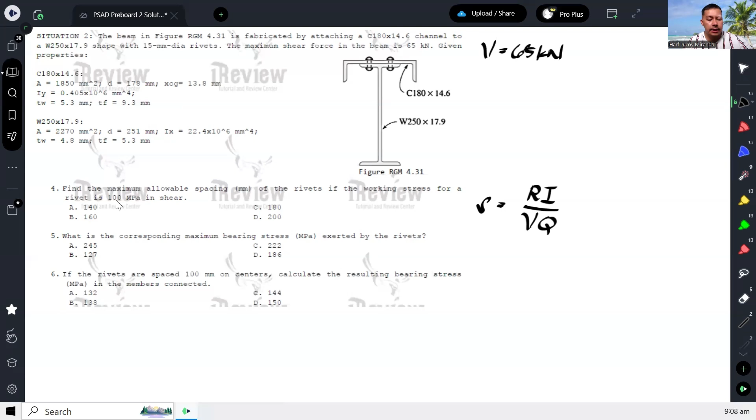First of all, let's define yung R. Yung R kasi ang binigay sa atin dito is yung strength ng rivet sa shear na naka megapascal, so that would be 100 megapascal. Ibig sabihin, that is just force nung rivet divided by area ng rivet, which is pi over 4 times ang diameter ng rivet is 15.

Okay, so dito mako-compute natin yung capacity ng rivet. So that gives us 100 times pi over 4 times 15 squared, so this will be in newtons. So 17.67 kilonewtons. Okay, so yun yung capacity ng isang rivet.

And then I, so let's calculate for I. Yung I naman is yung moment of inertia nitong section na to. May binigay dito na moment of inertia pero ng channel tsaka ng wide flange lang yan. So kukunin muna natin yung location ng centroid.

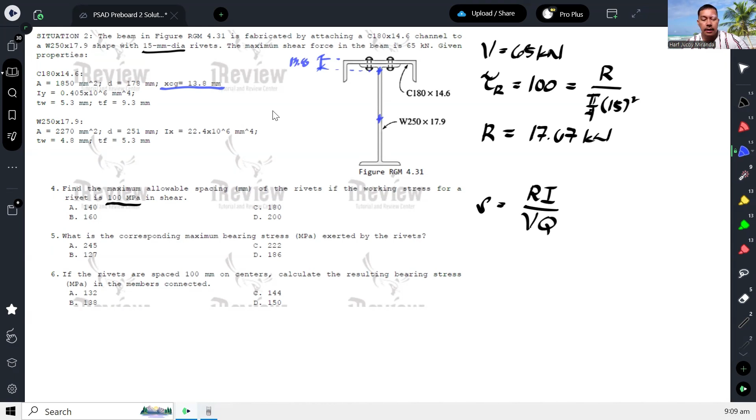So yung centroid ng channel according to the problem is at distance x, which is 13.8. Tapos syempre yung centroid ng wide flange is nasa gitna niya. Pero i-measure na lang natin from the top. Okay, so from the top, we have here thickness ng web nung channel, which is 5.3.

Store natin to. So thickness ng web, which is 5.3 plus overall depth divided by 2. So ang overall depth ng wide flange is 251. So that gives us 130.8.

Okay, and then hanapin natin yung location ng centroid ng built-up section. Tawagin na lang natin to na Y-bar. Okay, and we can calculate that by Varignon's theorem.

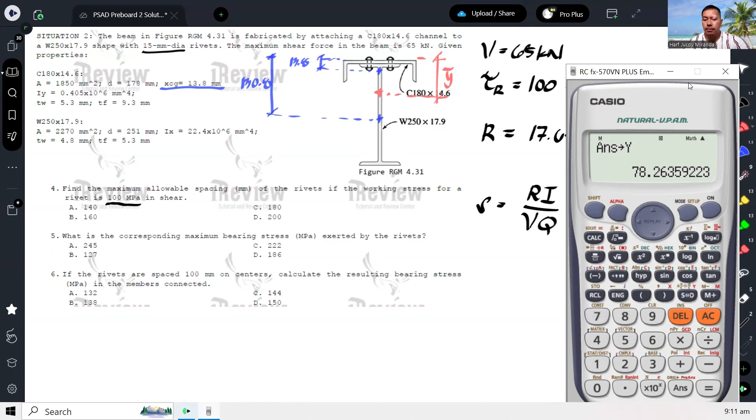So, Varignon's theorem, we have yung area nung wide flange that is 2270 times yung location niya from the top, which is 130.8, plus yung area ng channel, which is 1850 times yung x ng channel, which is 13.8, divided by total area. Total area is 1850 plus 2270. Okay, so that's 78.26. Store natin sa y.

So, ngayon, kaya ko sinolve yun is para makompute naman natin yung moment of inertia, kailangan kasi natin ito. Okay, so moment of inertia tayo. So, ito, sulat ko.

Sa neutral axis. So, yung wide flange, ang moment of inertia niya sa local centroid niya ay ito, which is 22.4 times 10 to the 6 plus AD squared, o yung area niya, 2270 times yung distance na to. Distance sa pagitan ng neutral axis at ng local centroid, so which is ano lang, difference lang yan ito.

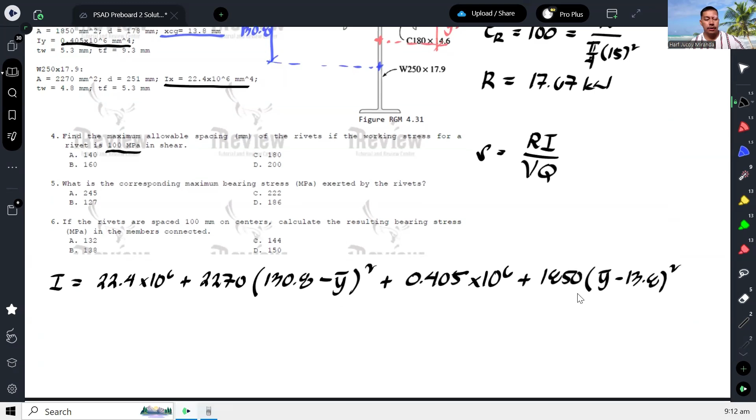Squared. Okay? Plus, yung local centroid naman ni channel, ito, so 0.405 times 10 to the 6 plus yung area ni channel is 1850 times ang distance naman ng neutral axis sa local centroid niya ay ito, which is difference lang ulit ng y bar at ng 13.8 squared. Ayan. So, yun yung moment of inertia natin combined.

So, 22.4 times 10 to the 6 plus 2270 times 130.8 minus y bar squared plus 0.405 times 10 to the 6 plus 1850 times y bar minus 13.8 squared. Okay, so ito yun. Store natin sa M.

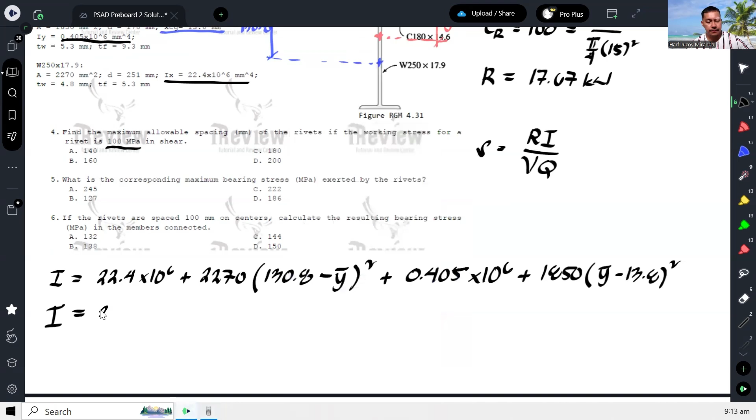So this is 36.758 times 10 to the 6.

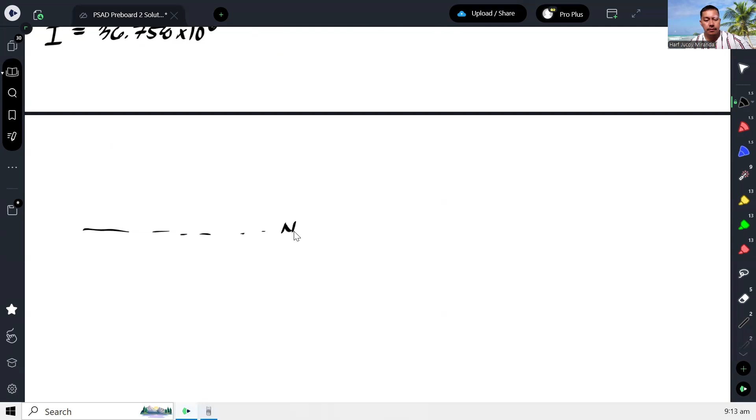Okay, so meron tayong I. So last Q na lang, no? So to calculate for Q, di ba sabi ko yan yung statical moment of area above the rivets. So, ibig sabihin, kung ito yung neutral axis natin, okay? Kasi di ba nandito yung rivet natin.

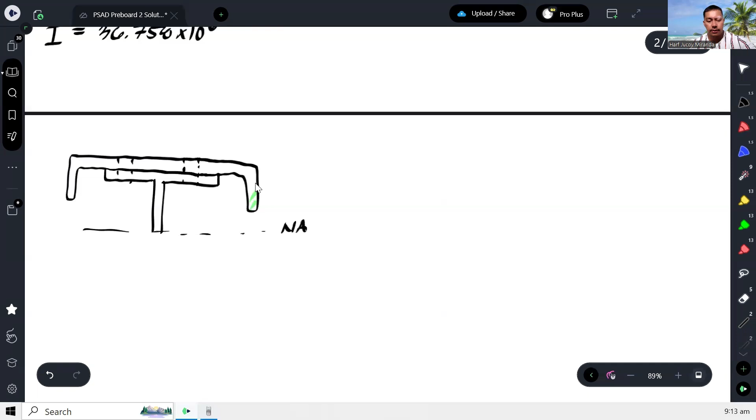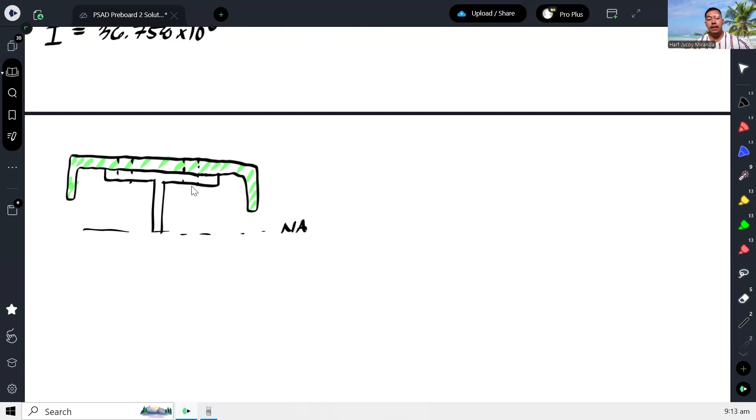Okay, bali, ang mangyayari kasi, itong channel na to ay dudulas sa ibabaw nung wide flange. And para mapigilan yung pagdulas niya, kasi pag nag-bend yan, dudulas to forward eh. Kasi ito naman, parang, kumbaga, parang magkikiskisan sila. So, ang pipigil nun, ito.

Okay, so ano ba yung moment na kailangan niyang i-resist, no? Yun yung Q. So bali yung moment netong channel na kailangan niyang i-resist. So ibig sabihin yung moment na is yung moment area niya from the neutral axis. Bali ito.

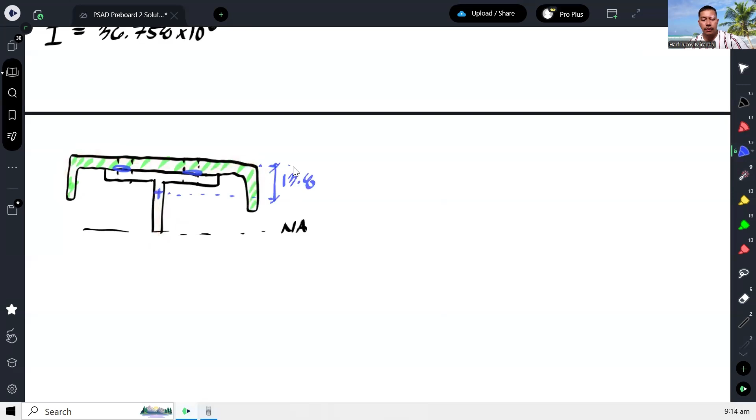Bali parang ito yung area, tapos ito yung moment arm. 'Di ba kanina ano to, 13.8. Okay, tapos ito yung Y bar na 78.25.

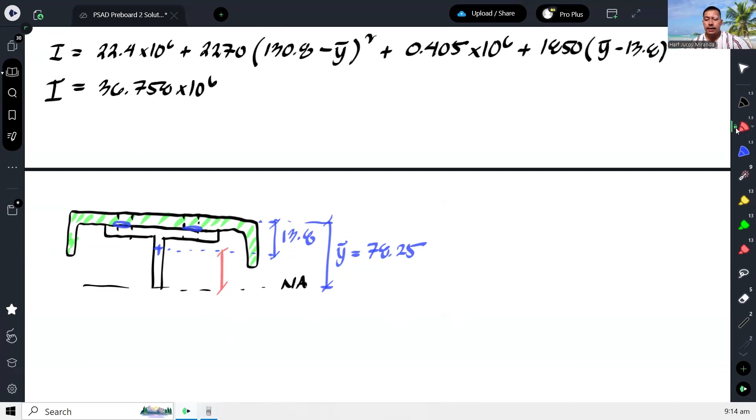Okay, so ang moment arm natin bali ito. So our Q would be equal to yung area ng channel, which is 1850 times yung moment arm natin na Y bar minus 13.8. So our Q would be equal to, so that's the value. So 119,257.65 millimeter cube.

Okay, so store ulit natin to sa E. Okay, so yan. So I think that's it, no? Ito yung ano, no, R. Okay, na kilonewton.

Okay, so therefore our spacing would be R na naka kilonewton, gawin natin newton, times I over V. Ang V natin is 65,000 para maging newton. Tapos yung Q natin is ilagay ko sa E.

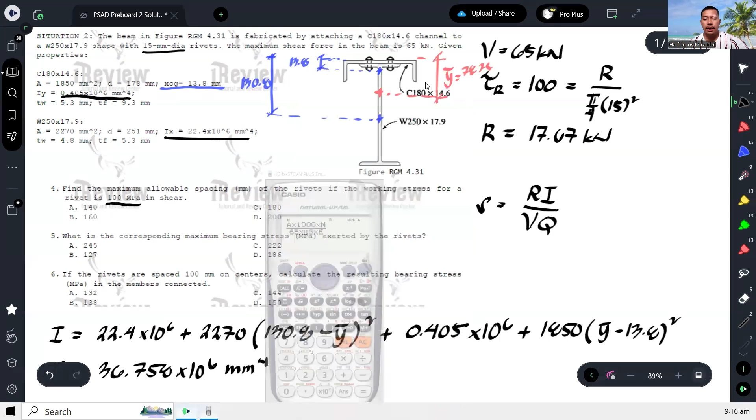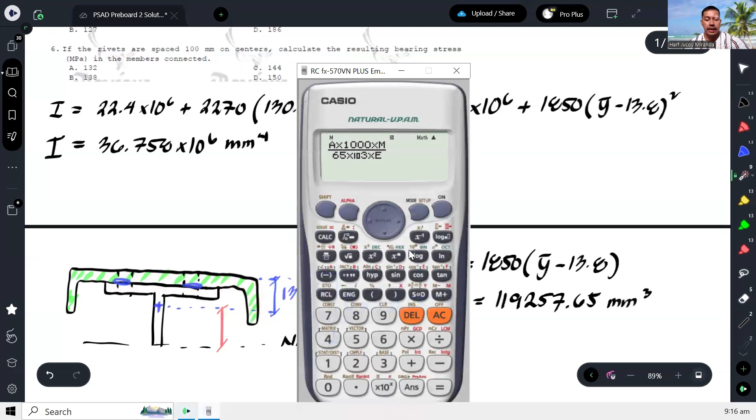Okay? Pero don't forget, itong R kasi na to is capacity ng isang rivet. Pansinin nyo na ang kumukontra dun sa pagdulas nito forward is dalawa sila. So kaya itong R natin, ito times 2. Okay? And that gives us the spacing. 167.59.

Okay? So yan yung maximum spacing. Kumbaga yan yung limit. So ibig sabihin, hindi tayo pwedeng lumagpas dyan. So that's why ang sagot dito is yung next smaller spacing sa choices, which is letter B.

Okay? And then, what is the corresponding maximum bearing stress exerted by the rivet? So pinapahanap naman yung bearing stress. So this is for number 5. So para sa bearing stress, simple lang yan. Bali, kapag tinignan kasi natin yung channel, kunwari yung channel, no?

So, nandito yung wide flange. Yan, so nandito yung rivets, no? Ay, so nandito yung rivets.

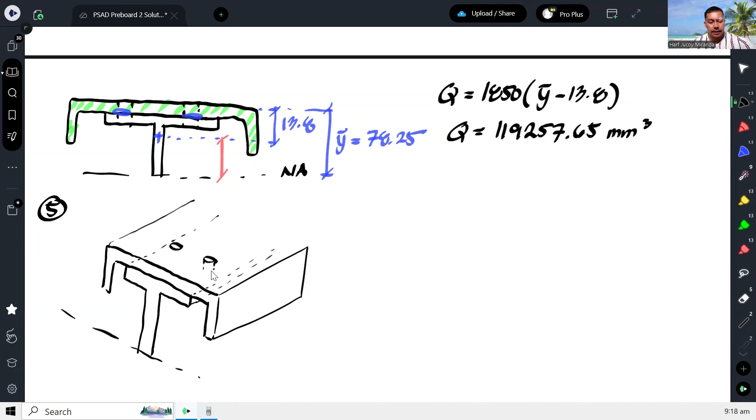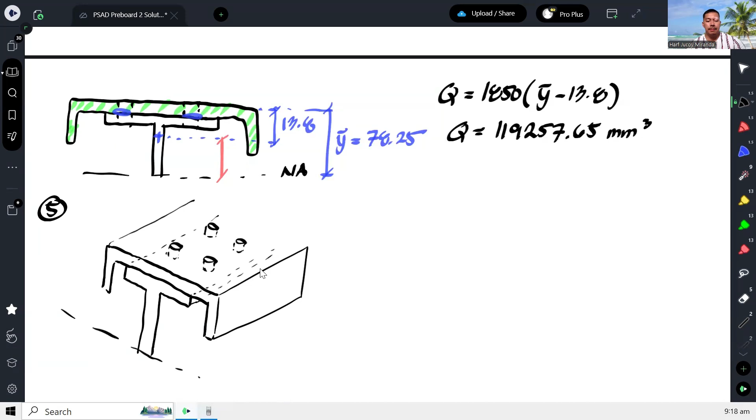Okay, so di ba ang mangyayari, marami yan actually. Pero per layer lang yung analysis natin. So di ba ang mangyayari, etong rivet na to, magkakaroon ng reaction or force dito. Okay, tapos yung force na yon, we will assume na equivalent siya sa R. Kung ano yung capacity niya. Okay, so ano mangyayari? Mangyayari, para lang siyang bolted connection na yung top view niyan, parang ganito yung mangyayari.

So ito yung butas, so ito yung rivet. Babanggain niya yung butas ng value na R. Okay, so ibig sabihin, kapag tinignan natin yan sa front view, ito, makikita natin is ganito siya. So bali, ito yung ano, ito yung butas na yun.

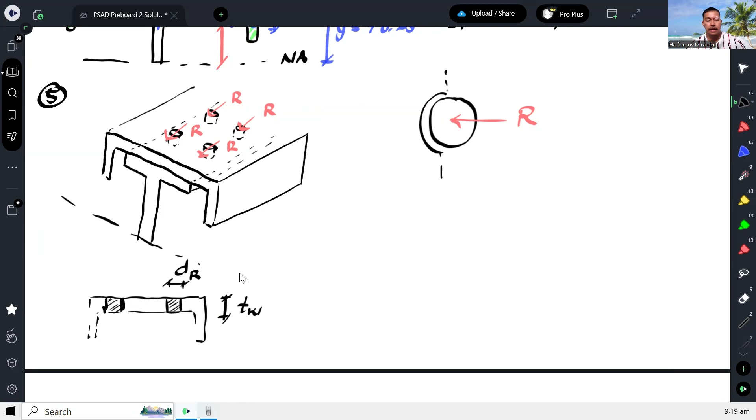Okay, at yung butas na yun is just, yung projected is just rectangular. So ito lumalabas, thickness lang ng web ng flange. Tapos ito lumalabas is diameter lang naman ng rivet. Okay? So hindi diameter ng butas ha, diameter ng rivet. Kasi alam natin na mas malaki yung butas dito kaysa doon sa mismong rivet. Kaya lang, ang contact area lang naman, syempre, is kung ano yung diameter ng rivet. Okay? Ganun kapag bearing, no?

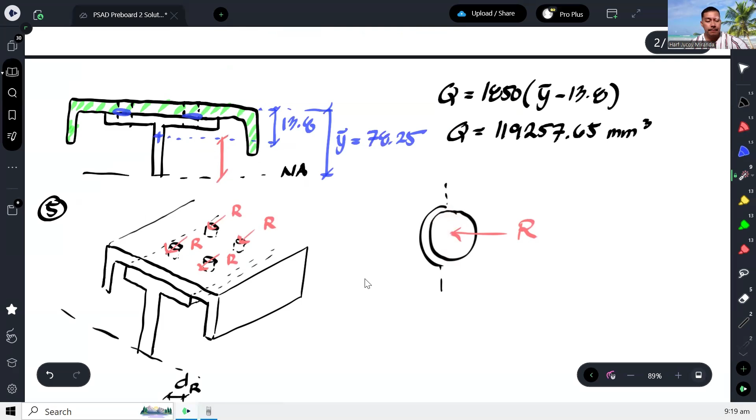Anyway, for number 5, the bearing stress will be equal to the reaction R divided by the diameter of the rivet times the thickness of the web of the channel. Okay? Actually, dapat i-compare natin, no? Dalawa yan, no? Dapat i-compare mo yung magiging contact niya dun sa channel tsaka dun sa wide flange. Kasi meron pa tayong wide flange sa ilalim.